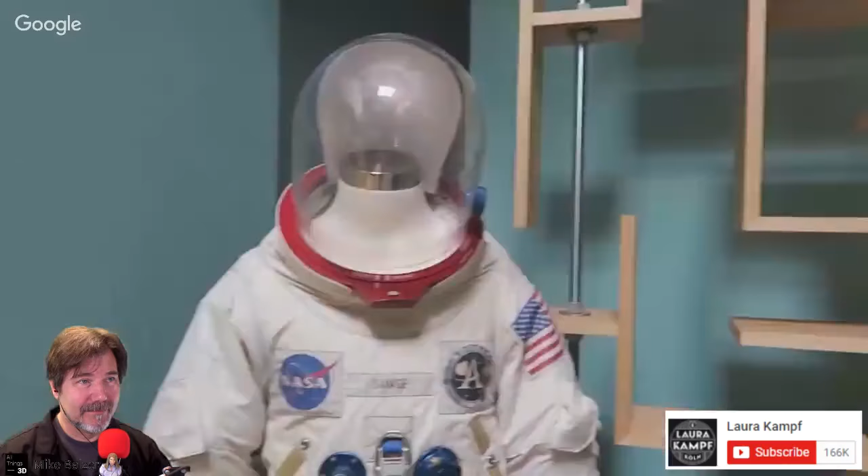It's now Tuesday, we made a quick jump in time. After I went to Tested last Friday, Norm introduced me to everybody and showed me around the Tested headquarters. And then we went to Adam's cave where I met Adam, and we recorded the Still Untitled podcast together with Norm and Simone, who was there via Skype because unfortunately she's in Sweden right now.

Saturday and Sunday, Lucy and I went around the city and did all the touristy stuff.

Run through this yesterday real quick, so we can get to MakerFaire once again.

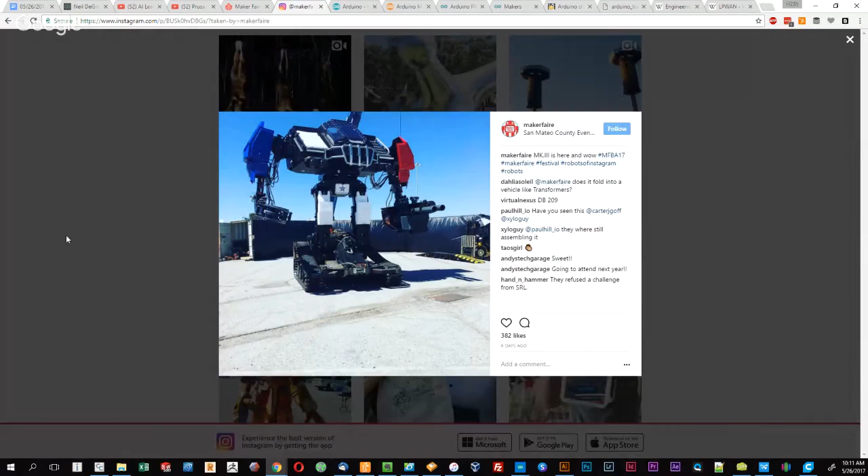They had this gigantic robot that they were punching a Prius with, which was hanging from a crane. They couldn't quite get it working perfectly. They also had people riding around on this gigantic ant thing. All kinds of ingenuity, always at the Maker Faire.

Some really great, cool stuff to see, always unique makers. So I'll run through some of the highlights I saw. I don't know if you checked out our theme, the Modern Makers Toolkit — and the place to find out where you can assemble your toolkit would be at the show you went to. So keep that in mind as you go through this.

I've been looking at this Prusa i3. Obviously everybody's following it, it's the hot item, the hot printer to have right now. It just won 3 of the main categories for Make Magazine's 3D printer shootout last year.

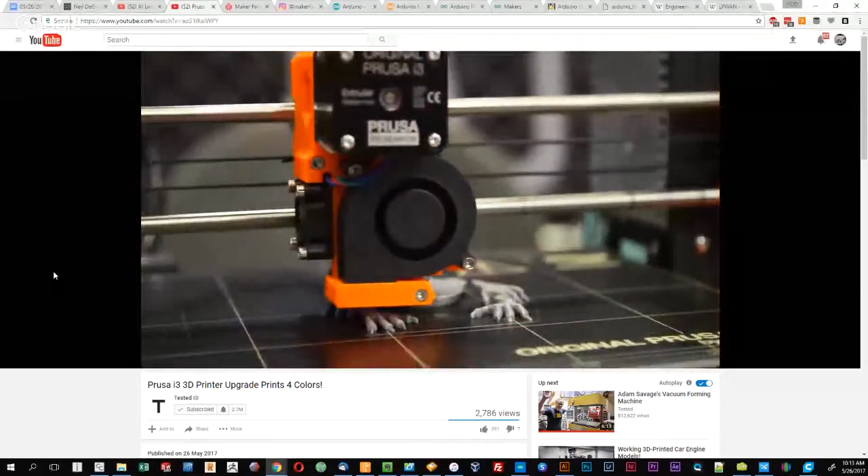I think the shootout actually came out in January, as a wrap-up for last year. And they've announced an upgrade that is pretty interesting — it's available to all Mark II and Mark II S owners out there.

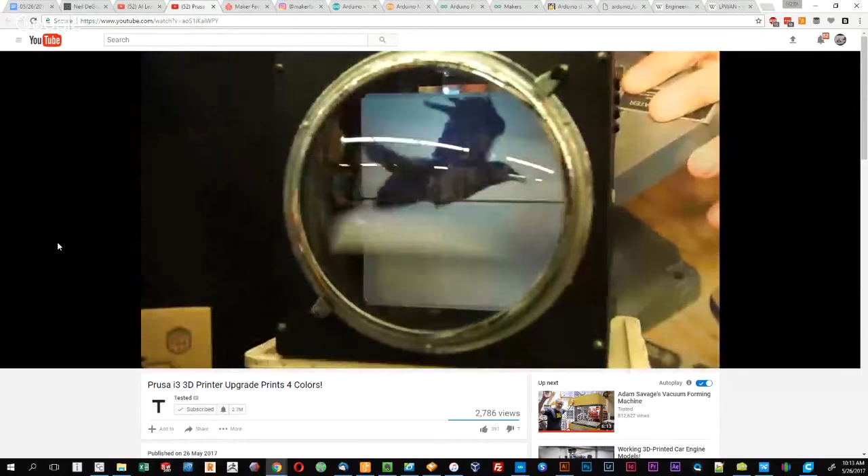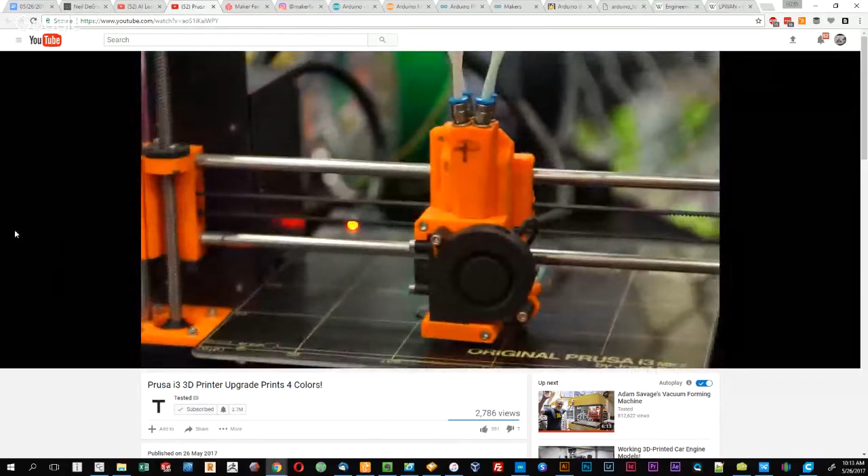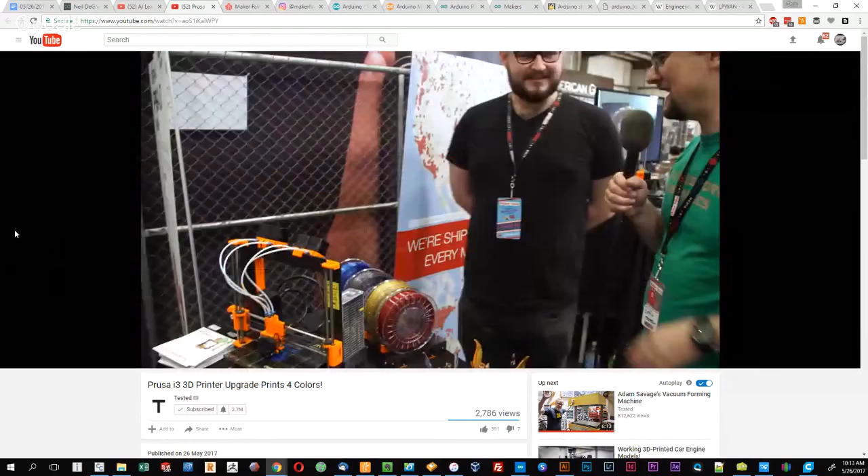Here's some footage from the Maker Faire that's right up on Tested, of some really cool machines running around. I can fast forward here. So what this upgrade lets the i3 Mark II do is print 4 colors under one nozzle without any head alignment, and it does it in a really unique way.

They basically use what you'd call an ooze shield — you print a secondary piece that primes the nozzle, and then it's ready to go. It's a 3D printable upgrade available for anybody that owns one, and they already have it working pretty much perfect. They were showing this off, and I thought it was really, really neat.

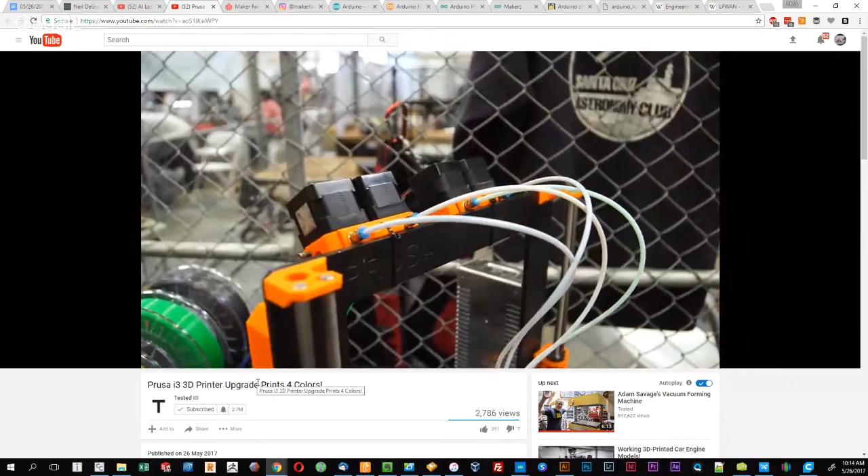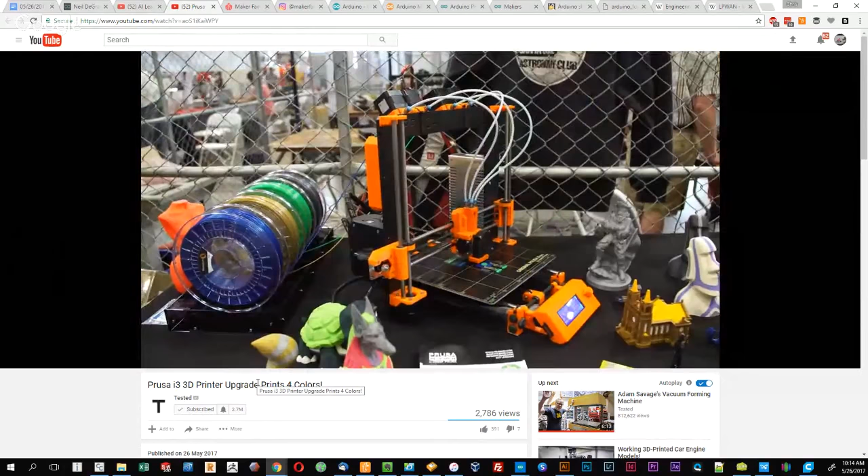You can also print support material, and print combinations of almost any material, up to 4 different things at once. So I'm definitely jumping on the bandwagon here, probably scooping up one of these printers as quick as possible, and getting that upgrade too — because it not only has mesh bed leveling and all the latest all-metal hot end, the PEI build surface is really unique and keeps a constant temperature.

It also prints these beautiful models in ultra-high definition and multicolor. They had some really cool models showing that off — did you see that little benchy back there? Yeah, the little mini benchy, but it was multicolor.

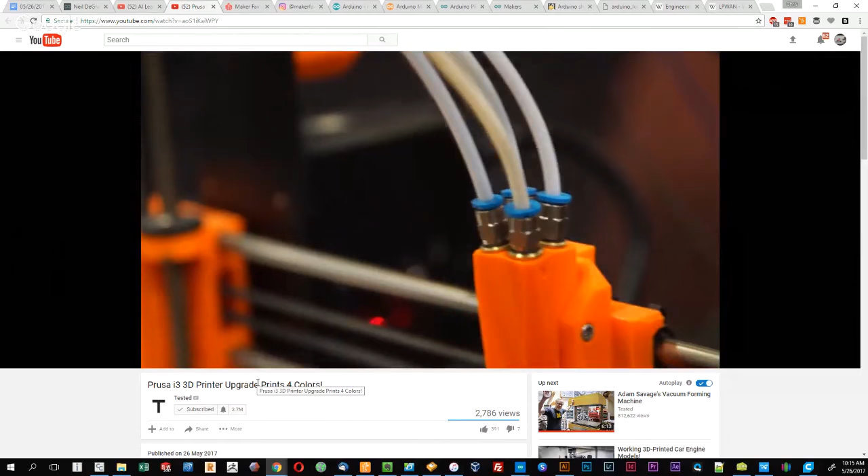So what's the price on this? The kit, fully assembled, the printer is $899, and then the upgrade is just something you 3D print yourself. The files are readily available, and I don't think there's much else needed other than those Bowden tubes and maybe some mounts — oh, and obviously you need stepper motors, or extra extruders.

I don't know if they have that up on their website quite yet. They said they were running a little behind, so they just wanted to get it ready to show it off, and then they were going to put it on the website.

So here he's showing off the ooze shield that they built to prime the nozzle. That was definitely a highlight. I really enjoyed watching, going up and seeing the Prusa, and all the 3D printing is amazing.

And then obviously an update from Massimo. On the Arduino camp, there were some cool updates. One is the MKR1000, which is basically the Arduino Zero packed with a Wi-Fi shield.

Now the biggest thing, and Massimo, you could tell he was a little tired. Obviously he travels all the way from Italy just to give the talk at MakerFaire, and his talk was a little sleepy, but there were some nuggets of information kind of hidden in there. I don't think a lot of people were even paying attention. I think a lot of people just went into the room just to have a seat, and I don't even know if many people even understand what Arduino is that go to the talks.

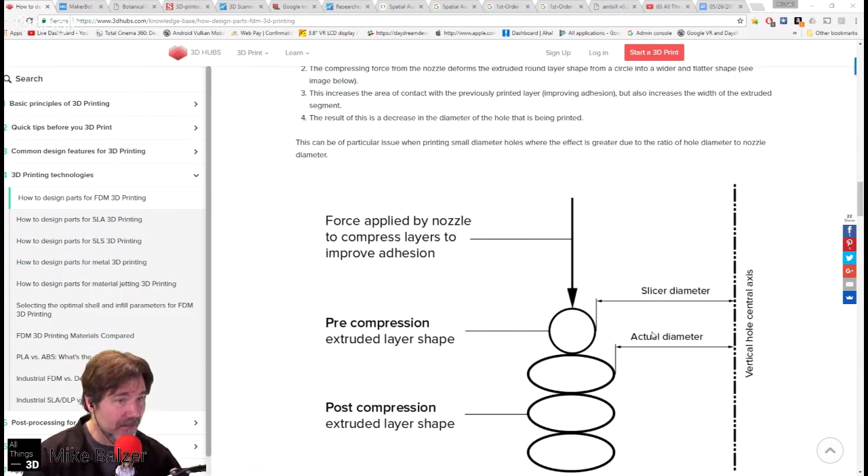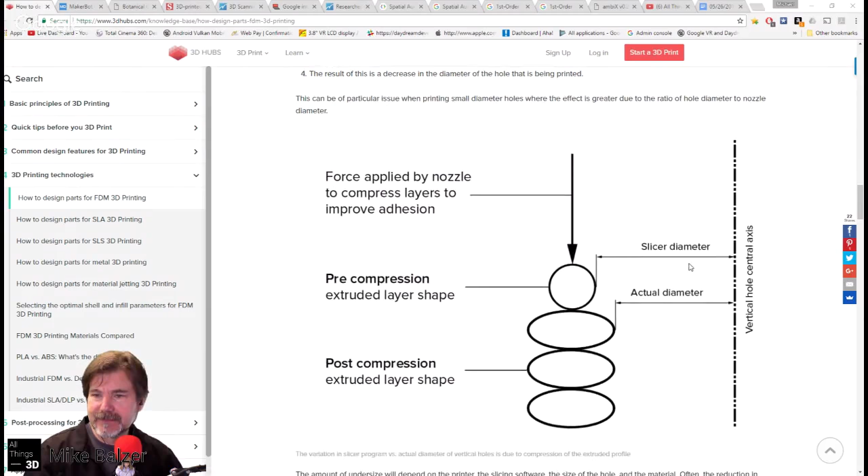3D Hubs, if I remember correctly, is a place you can sign up if you're 3D fabricating and become part of a hub or network used by people who don't have a 3D printer. Is that correct, Chris? Yeah, I'd say it's one sales funnel. A lot of people do go to 3D Hubs, it's a good place to shop pricing. But it's also a mixed bag of what you're going to get, because a lot of times you're working with a guy out of his garage. Nothing wrong with that, garage inventors a lot of times can give you better service than a big corporation. I like to be somewhere halfway in between a big Shapeways and a garage.

A lot of times they aren't necessarily brick and mortar, they're some guy at their house printing, which is great. They have an open printer and they post it on 3D Hubs, and it's a great way for people to have access to cheap 3D printing. Totally agree. In fact, I'm probably going to reach out now that I live in a larger community. Some of these 3D Hubs would be here in Portland, and I'm sure there's thousands in Portland.

All right, so that's a little shout out to them, and thank you for reminding me to update information. Sadly, I'm getting out of the Service Bureau, but our co-host Chris could probably review it and add a few of his own tips since he does this day-to-day. He helped me out again, he beat out Shapeways. One of the things that's nice about working with independents is that if you need something really fast, sometimes Shapeways and the larger ones can't do it, or the price becomes exorbitant. Thank you again, Chris.

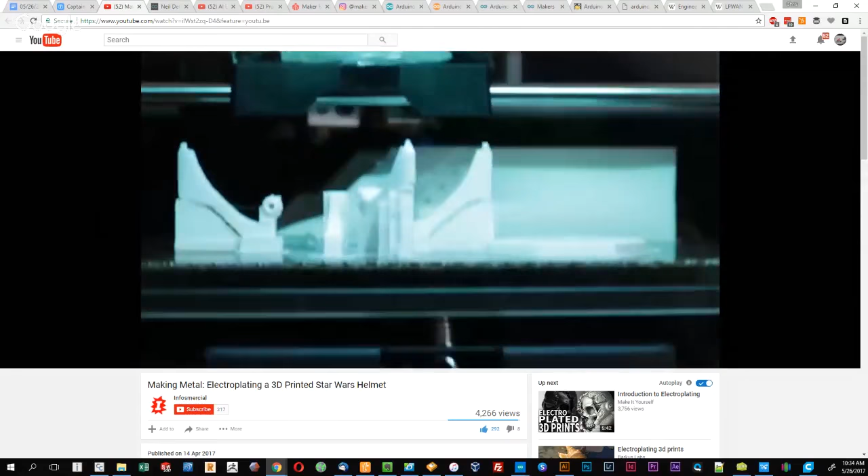What's the next news item, Chris? Making metal. This was awesome, we got to watch a little bit of this. This guy did a really good job on this video, I never really knew him. Infosmercial is his channel on YouTube, and this is incredible actually. He 3D prints a Star Wars helmet, and then proceeds to show how to copper and nickel plate it, electroplate it, using a brush-on plating technique, which I really can't wait to try now.

Not with the Star Wars helmet, but with maybe something else. So what he does is he prints it here out of just a standard PLA. He has this very comical video, and I recommend, I put it in the show notes, anybody that wants to get into this should go out and watch it. It's really good. What he does is he sprays it with this, it's MG Chemicals Super Shield.

It's a nickel conductive coating. So he sprays his PLA, and that makes it prepped for electroplating. And then he touches it up with another little acetone mixture he mixes up.

Then he gets into the nitty gritty, and this is unbelievable. So he buys this kit from Caswell, which is a plug and play copper electroplating kit, and it comes with everything you need. I'll try to add a link to the actual product, because I'm gonna go buy this.

What he does is tie the electrode up, because part of electroplating is you have to have the surface be electrified. So then he starts brushing on a charge. Yeah, so you have to have a charge.

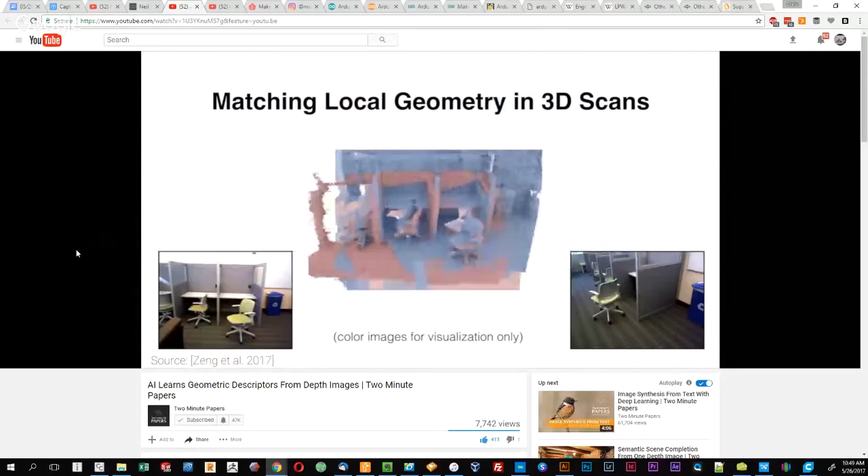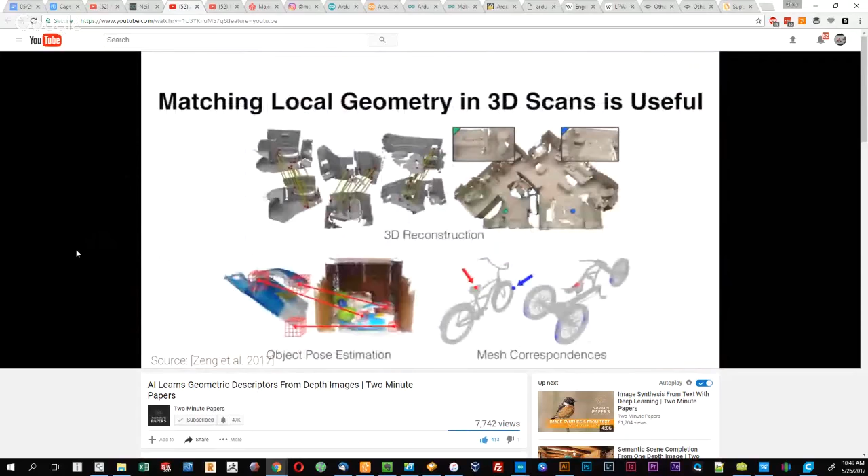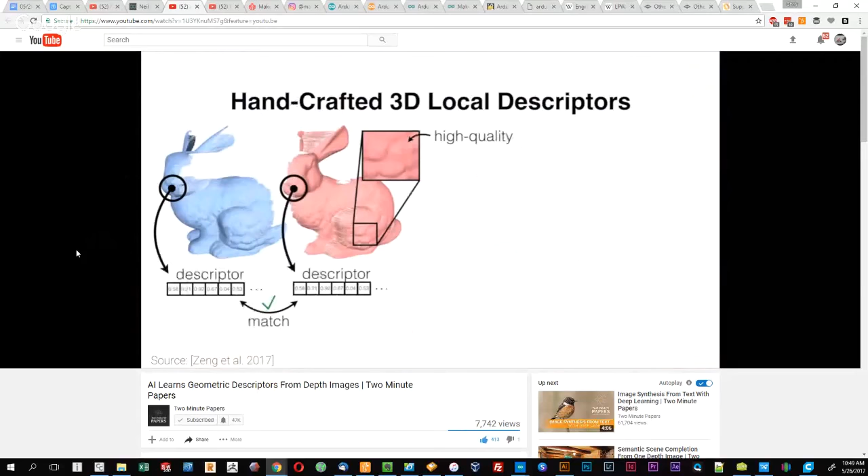And 3D scans. What normally you do, to combine different 3D scans from different angles to make a 3D scape, is you have to physically pick out descriptors. So like a human still is required to pick out descriptors by hand, identify areas that match, because a lot of times the computer has a really hard time doing that. Well, in this case, what they've done is they've built a neural net that actually can identify descriptors better, and it can actually reconstruct 3D scans and do a lot better job.

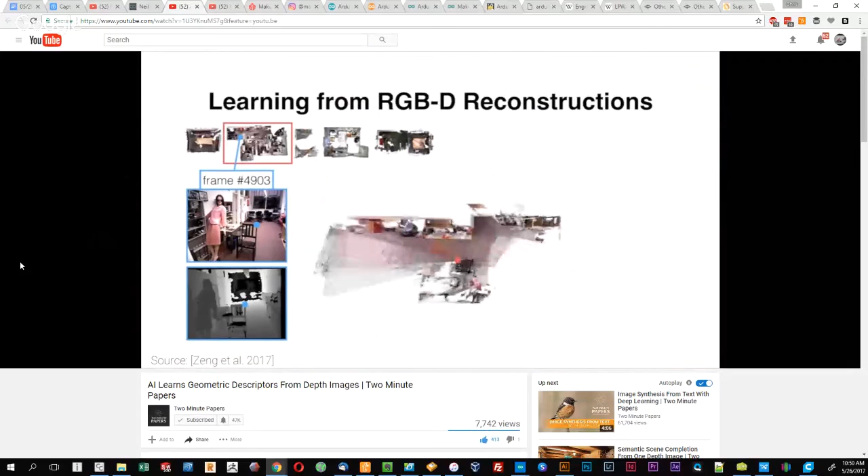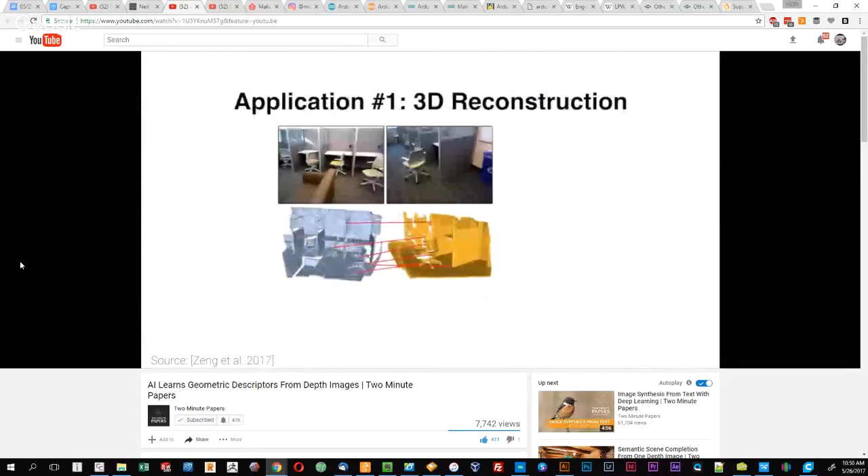So they have some examples here as the paper, or as the video, kind of goes on. They have some case studies about traditional methods, and even just compared to humans - because neural nets have such a high amount of processing power, it can do a lot better job than even a human, and it can actually make 3D scans from way crazier angles. It can actually reconstruct a room from a much higher variance in scans than a human could do.

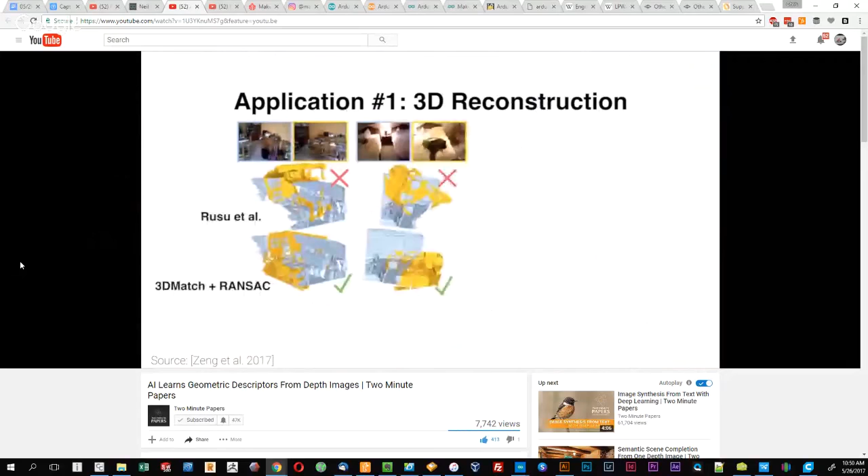So here's the normal RANSAC, and here it is showing 3D match. This is theirs down below, and they're showing some different matching here that the computer's doing. And obviously it becomes a lot more obvious, like they show there, when you have like 6 scans that you want to combine, or if you have multiple objects that don't match at all, having the computer or the AI be able to figure out how the objects line up, and it'll say, hey, no, they don't line up, or yep, we found a way to line up.

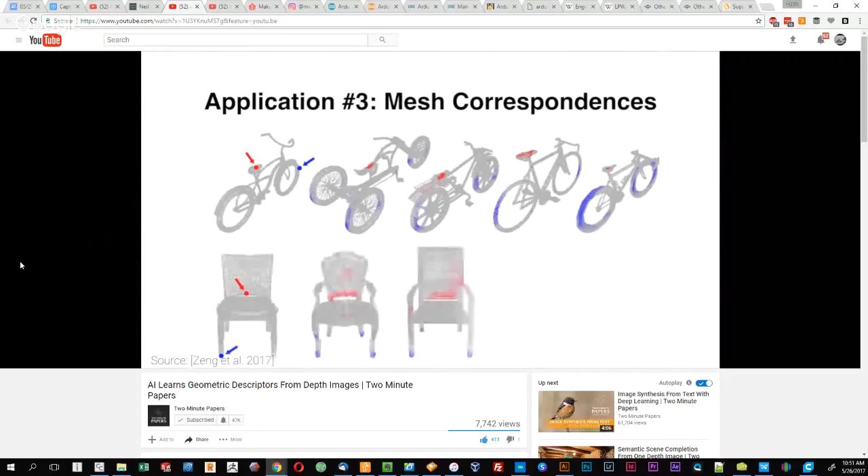So to kind of bring this home a little bit, if you're familiar with all the conversations I've had about the occipital structure sensor, they use the RGBD technique, and I would not be surprised if something like this is already being used.

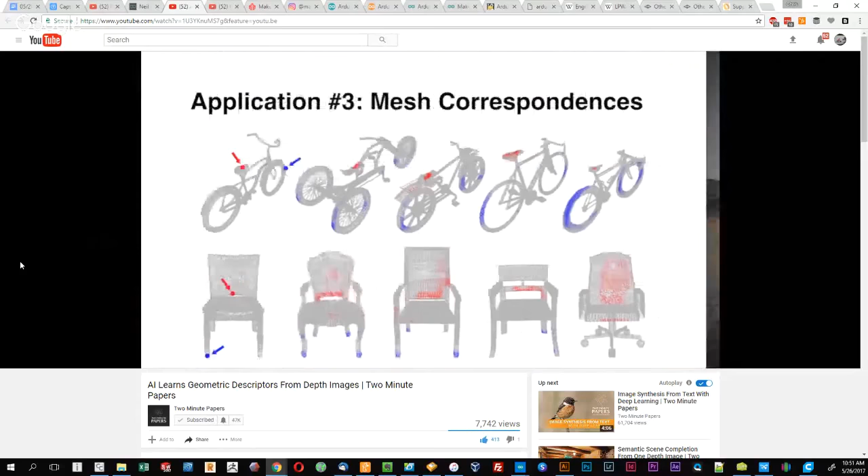We've covered it before, their ability to scan full rooms and piece the pieces together in real time. They've got some pretty good algorithms. I don't know if they're using this, but there are some strengths in the techniques they're using to take dissimilar objects and ensure they match correctly without any human intervention.

Neural nets are just an amazing way to do this, there's a ton of machine learning effort going into neural nets right now. Not surprised, with processing so cheap, developing neural networks is obviously much easier to do.

One of the things at Google I/O, I can't think of the name, but they've got their own processor units now that they're building up. That's right, the TPU. There's some interesting talks from that Google I/O, I haven't watched all of them.

Mike must have cut out. Are you still there, Mike? Well, Mike's dropped out, but I'm still here.

I guess I could touch on some VR. There was a Neil deGrasse Tyson Presents a New Space Odyssey game that allows you to explore in space. I don't know too much about it, but VR will be playable in the Oculus or other VR systems.

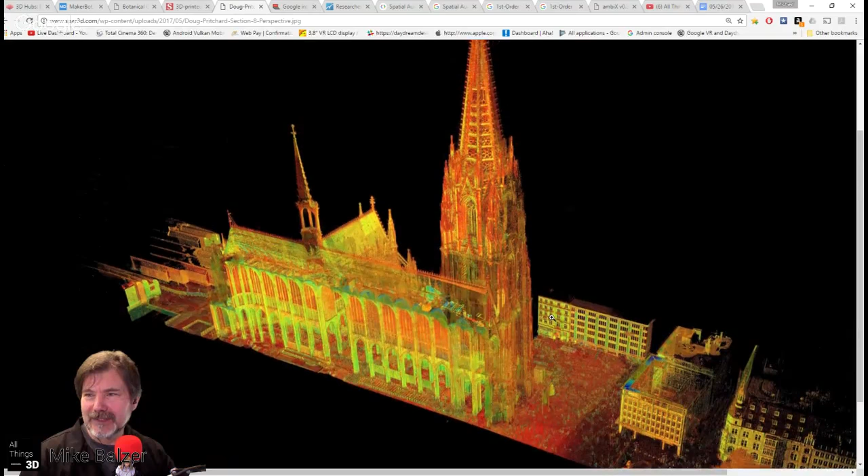Wow, impressive, huh? Very impressive. Holy crap. If you're wondering why would you spend the time to do something like that, well, working with an architectural firm, you're familiar with Hearst Castle, right Chris? You live in that area. Hearst Castle, we've had a few earthquakes, and they wanted to check out structural damage, so they used a LiDAR system to scan it and determine that.

To get things that are high, like in Hearst Castle, you normally have to be on scaffolds or large ladders to reach that. But with something this tall, they essentially created a structure they could push, as shown in this image, from above down, then inverted it and reassembled it. They said these scans pretty much exceeded or almost exceeded the capacity of matching all the cloud points, which from my experience, almost 15 years now, cloud point manipulation back then was very intensive and memory intensive. So I would not be surprised, but the results can be amazing.

Then you can go through that and turn it into a 3D model. Very interesting. Obviously we're using techniques like this, gosh, has it been about 3 years?

We had, what was the name of the group that went around and scanned monuments and so forth? We learned that one of the scans was funded by a European company and couldn't get access to it, Mount Rushmore. Can't think of them right now, they're based out of San Francisco, but we should revisit them in the future.

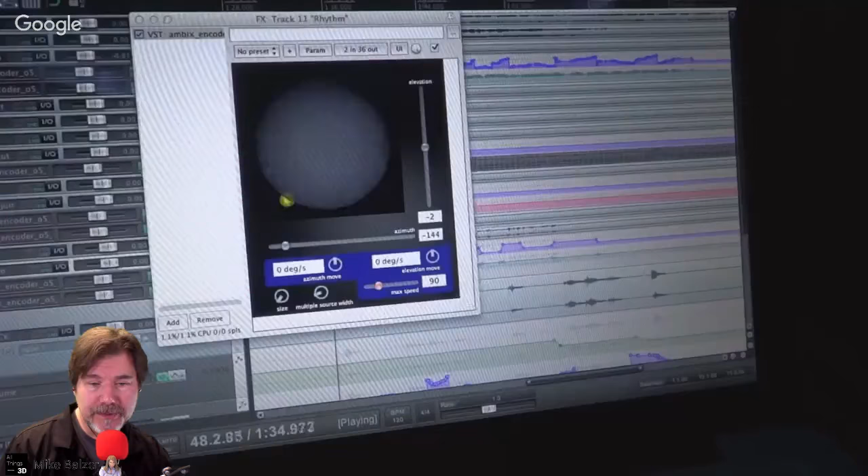[Video plays: Now I highly recommend that you go out to this link and look at it because it actually uses spatial audio, so you can experience this for yourself. He's literally recording this observatory in a multi-order ambisonic using his tools. He's got like 24 microphones, but he records... And here's the actual tool in play. He's using Reaper, which I just mentioned, which allows you to use a DAW with multiple channels, which is extremely important.]

Premiere does not have that capability, but if you're already using Premiere for your videos, and they do support 360, I highly recommend it.